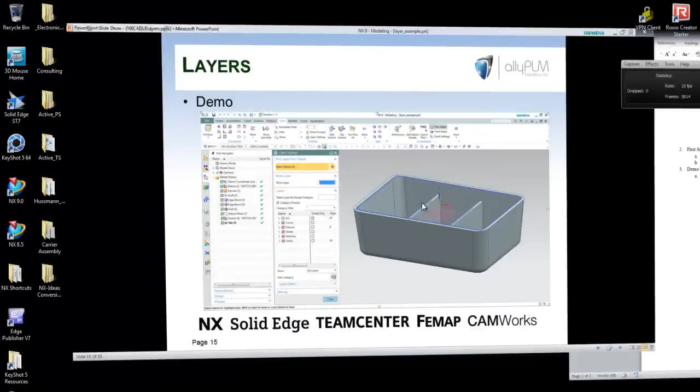Alright, so here I have a model, and in this case this particular model only has one solid body, but as you know, we can have multiple solid bodies. In this particular model we have a couple sketches, a datum plane for construction, and then the solid body. So if I go to the View tab, here are the commands on the ribbon. Here's make work layer, move to layer, layer settings.

If I go to the pull-out menu and I go to Format, Layer Settings, Layer Visible in View, Layer Category, Move to Layer, and Copy to Layer. As I mentioned earlier, I am using NX9. If you are still using 8.5 or older, you'll see that here's the same Format pull-down menu, and then in your utility toolbar you'll have layer settings.

Also, just in case I forget to mention this later, here in NX9 you see that this is Make Work Layer. Make Work Layer is also here in this top border bar. But if you are running 8.5 and older, you can turn on this work layer dialog, so that instead of going into layer settings to make the work layer, you can just type in the value and then that's your work layer moving forward. So like I said, you can add that to a toolbar. Customize your user interface.

Alright, so let's go ahead and click on layer settings to start off. I'm going to hit reset in my dialog just so mine's the default layout, and the first time you go into your layer settings command it would look similar to this. We're just going to work top to bottom through some of the options and how to manipulate this dialog. First of all, you'll see Find Layer from Object.

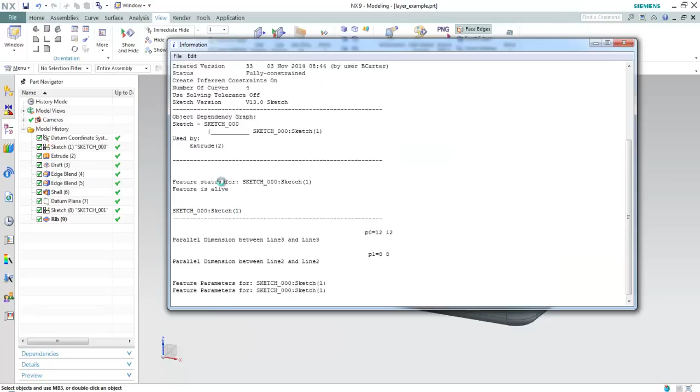So you can pick it graphically and say, hey, what layer is that on? It'll show you. Outside of that dialog, just a little extra bit of information. If you go to the Information pull-down menu and go to Object, and I pick that sketch again for example, in the information window it'll also tell you what the particular layer is for that feature, or in this case the object. So that was Information, Object. Let me go back into layer settings.

Here's another place to create the work layer. I can type it in here, or as I mentioned, I could type it up here in this particular tool. It's the same work layer. You can also double click to change work layers.

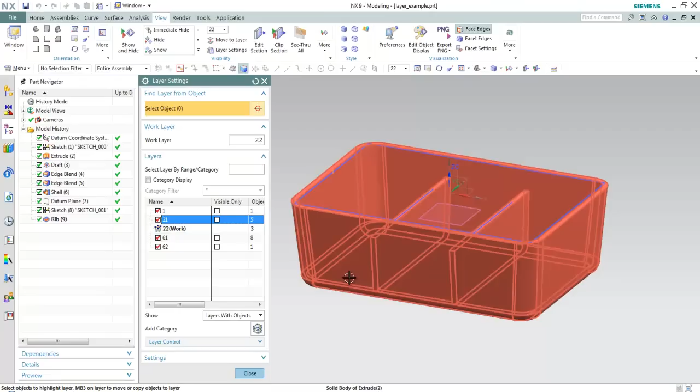We haven't talked about categories yet, but you see that I have one sketch on 21, another sketch on 22. Maybe I want to put another sketch on 23, so I'm going to go ahead and make 23 the work layer, which I could have typed here.

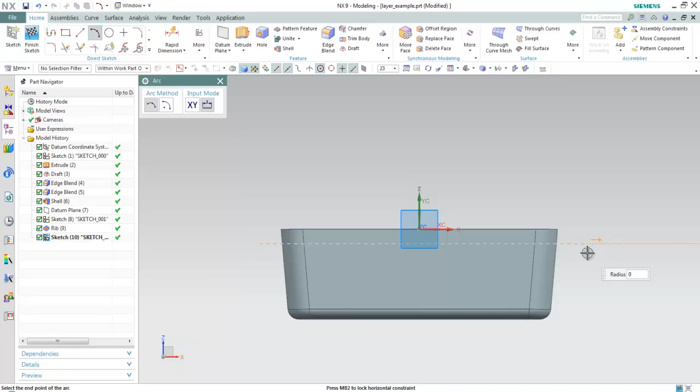If I want to create another sketch, I'll put it on the center plane. Maybe I need to put some kind of cutout shape to this particular part. Let's do it this way. I'm going to do an open profile. Let me get rid of that line, and let me just draw an arc, an open arc. Obviously I'd apply some kind of dimension to that.

So I have my sketch. If I go back to layer settings, I'm going to change my work layer so I can change the visibility of 23. You see as I turn that on and off, that arc sketch is being turned on and off. As I mentioned earlier, I could select it and it would show me that it's on 23. So I made 23 my work layer. Every object I create after that point is going to be on 23.

Later we'll talk about, well, what if I forget to change my work layer? Can I move an object to another layer? And the answer is yes, we have move to layer.

Let me go back to the layer settings. We talked about selecting the object to find what layer it's on, the work layer. Now let's look down here in the guts of the dialog where it says layers. We'll come back to category display here in a minute.

So here I have a list of some particular layers, right? There's one and it jumps to 21. Notice I have this filter down here that says layers with objects. So every layer that has an object, sketch object, datum plane, solid body, etc., is going to show up in this list. If I change this filter to all layers, then all the layers in NX are going to show up. If I scroll down to the bottom, you'll see that there are 256 layers.

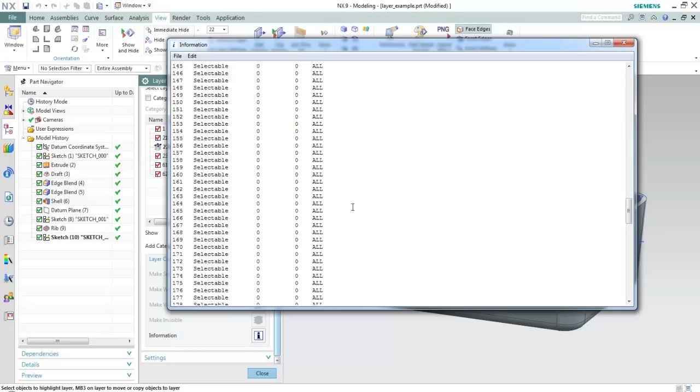I'm going to go ahead and collapse the layer control. Actually, before I do, there's another bit of information here. There's an information command or option you can pull up, and that'll pull all your layer information out into a text file.

So that's what that does. I'm going to go ahead and collapse the layer control. So we've talked about the work layer, visible, invisible, and visible only, which means it's not selectable. If I come over here and look at the columns, we have a name column, which is the layer number, and the visible only status.

We have the object count, so it tells us how many objects are on that particular layer. And notice here is a category column. It says that layer 1 is part of solids, 21, 22, and 23 are part of sketches, that's why I put them in there, and 61 and 62 are part of the datums category.

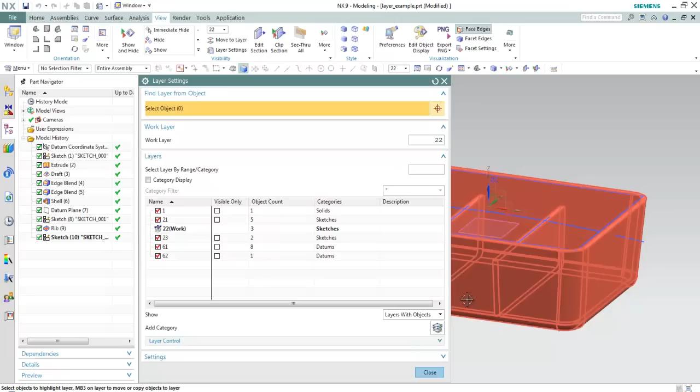If I right click on a column, you can go to columns, and I could also turn on description. We'll look at description here in a minute. Also underneath columns there's configure columns, and you can reorder the order, kind of left to right, of those particular columns.

Now, while we're talking about categories, you see there's a checkbox here for category display. So I turn on category display, and I'll bring this back over here in a minute, and notice how it kind of cleans up the long list.

Now, it wasn't that long because I had layers with objects, but if I change this to all layers, we don't see the 1 through 256 at this level. Now you do see a category called all. If I branch that open, then that is 1 through 256.

But this is where we're really going to start talking about our layer standards at our company. Obviously 1 through 256 can be used a certain way at our company, but having this category display turned on, we can say all our curves, anything that's a curve, is going to be on one of these layers, 41 through 60.

If it's a datum feature, it's going to be on 61 through 80. Or if we're going to add a sheet body or a surface, we're going to put it on 11 through 20. Or the solids are on 1 through 10. In this case, we added a sketch earlier, and the sketches in this particular template were set up to be 21 through 40. So this is giving you an idea of how we can have different categories, saying that this group of layers is going to belong to that category based on this object type.

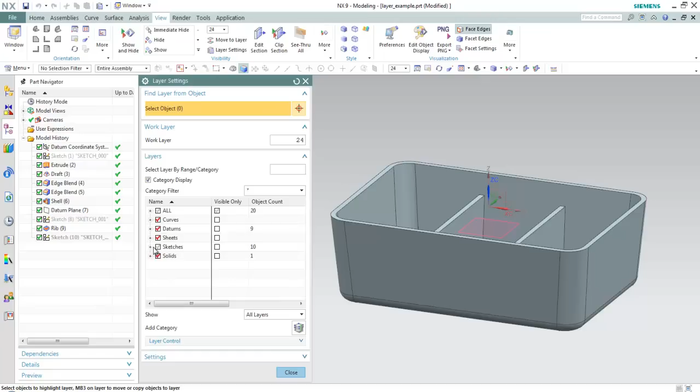So I can turn back on all the sketches with one click. Yes, you do have hide and show, just by coming out here and right clicking hide and show, or if you're used to the old terminology, blank and unblank. But notice here, having it on a layer in a structure, all of us designers or engineers, NX users interacting with the same data, we can have the same layer structure, and if we're all using that, it's going to make it easier for us to interrogate somebody else's model.

Okay, so how do we add our own categories? Well, if I branch open all, this was 1 through 256. So let's come up here and start creating another category. Maybe we'll start at 201.

I can come in here and do my control and shift range. I'm going to hold down shift and select 210 to select a range. If I right click, I can say add to category, either to an existing category or create a new one on the fly. So those were added to a new category, right now called new category 1.

Maybe I have something called construction, since that makes sense for our business needs. Okay, so we've added construction. Underneath construction, I have 201 through 210. I'm going to collapse that back. Okay, that was up to 210.

So maybe I want to do 211 to 220. Here you saw that I did a shift range, but up here I can also do something called select layer by range. So if I want to do 211 to 220, see how it automatically selects those for me. Then I can right click, say add to category. I'm going to say new category again, maybe one called reference.

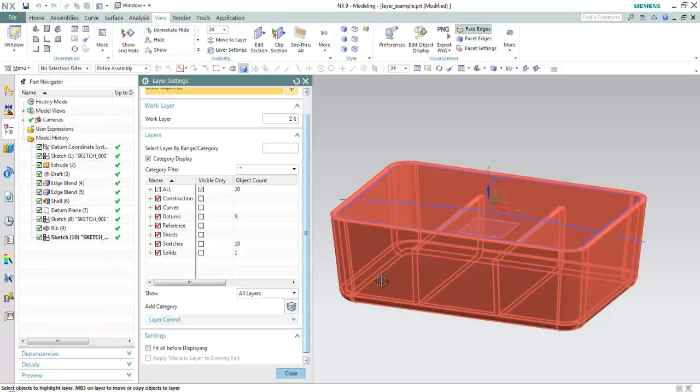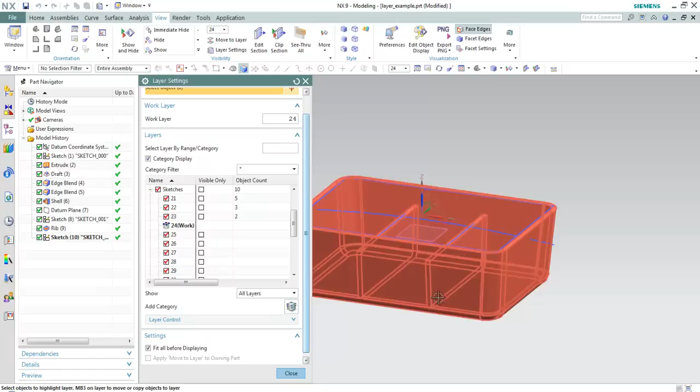So if I zoom out, if I come in here to a specific layer and I turn off that layer, now if I turn on this fit all before displaying, if I say show that layer, it'll automatically fit the screen. So all that's doing, whenever you turn on and off something, it'll automatically fit your screen. That's what that option does. Okay, we'll talk about the move to layer stuff here in a minute.

So to show the move to layer, I'm going to go ahead and open up the same model, but with a little different formatting. If I look at the layer settings here, I'm going to turn off category display for a minute. So here I have the work layer, and 61 is the only thing with objects. If you do a new out of the box Siemens template, I'm going to go ahead and turn off the work coordinate system to WCS for a minute for clarity.

If I come in here, you see layer 61 has that base coordinate system, that datum coordinate system that starts the template off. So basically everything after that, my work layer was 1. Everything I've done in here, I put it on one particular layer, in this case layer 1. So I want to be able to move these objects after the fact to their proper layers to maintain my standards. I didn't do a good job of changing the work layer before I created geometry.

So if I go move to layer, which as we said is also underneath the format pull down menu, I can come up here and say, okay, I want to move this sketch to a layer in the sketches group. I can't remember that it's 21. So if I click sketches, see how it's going to put 21, which is the beginning of that range. Maybe I want to put that sketch on layer 21. I'm going to hit apply.

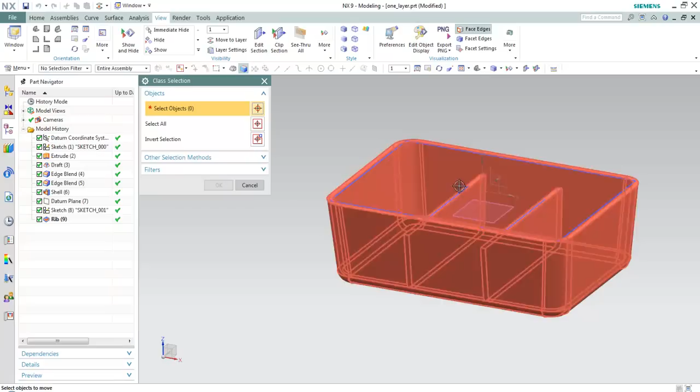So then I can come over here and grab this sketch and say, okay, well, let's put it on sketches. Well, maybe I also want that sketch on layer 21 so they're grouped together, but maybe I want it on its own layer, so I can change that to 22. I'm going to click select new objects. I'm going to grab the datum plane and say, okay, well, that needs to go into datums group. Well, that coordinate system was already on 61. Maybe I want this to be on 62.

Okay, so we've gone ahead and we've put the sketches on different layers. We put the datum on different layers. The solid body is on layer 1, which is okay. So if I go back to layer settings, right, solids, that was my work layer, which is the solid body.

So if I make layer 2 the work layer just for a minute, so if I turn off layer 1, that's the solid body. If I branch open sketches, there's 21, which is the rectangular sketch. There's 22, which is the rib sketch. And then underneath datums, we had 61, which was the base coordinate system, and 62, which is the datum plane there. Okay, so you'll see inside of layer settings, I can build my categories, and then after the fact, as I showed you, we can do a move to layer.

Okay, if I come back up here to the format menu, there's also a layer category here. Now layer category, you'll see that here's my existing categories. I can create a new category. So earlier I did the example of construction. I can say create/edit. Okay, so that's going to create the construction category, and I can say what layers I want to be in here. So I think we had said 201 to 210.

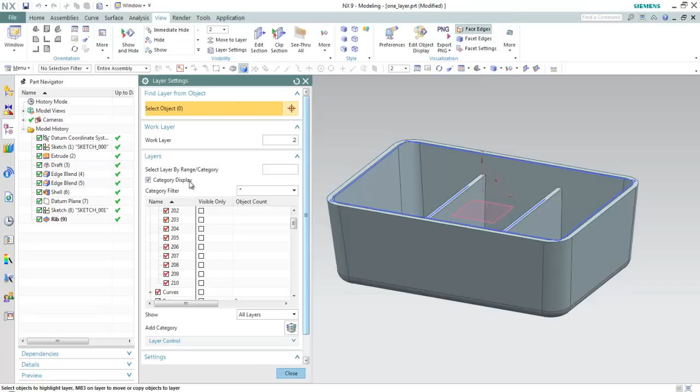I personally prefer doing the categories here in the layer settings, kind of all one-stop shop, but there's nothing wrong with going to format and setting up your categories here. I'm going to go ahead and talk about it now. I mentioned I would talk about it later, but setting up a template, right? Here I had two separate part files, so I had to redo the work to set up that extra category in this new file.

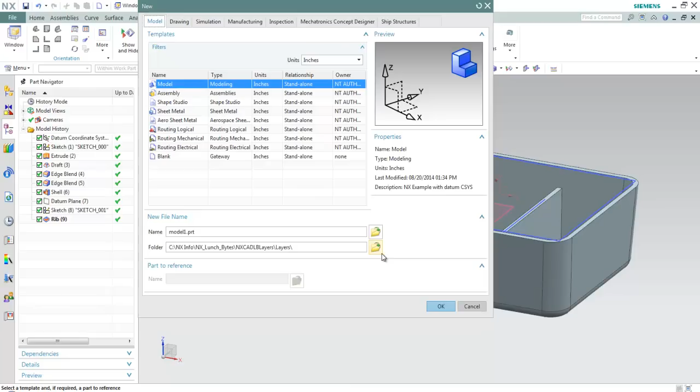So myself as maybe a CAD administrator or a person in charge of my NX install, maybe I want to set up a template. So whenever I do a file new and I go grab a model template or my company standard template, I already have the layer categories set up, right? So when I go into model and I go into my layer settings, I have the categories and the range of layers set up, so I don't have to create those each time, right? It's starting new. Now I just use the category and use the layers. All right.

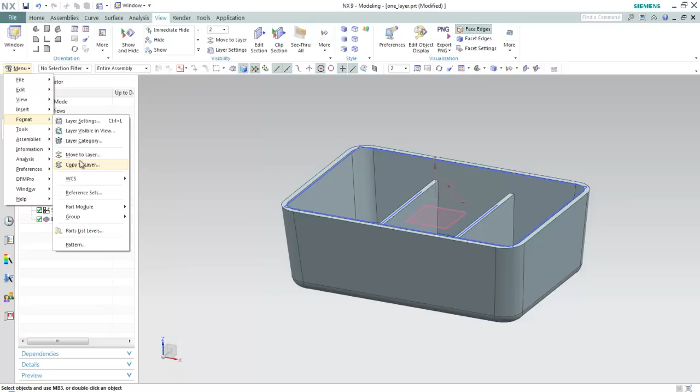The last thing we want to talk about is the layer visible in view. I guess I could mention, I'm not going to take the time to show you, we did move to layer, but you could also copy to layer. So an object can exist on more than one layer. Okay, layer visible in view.

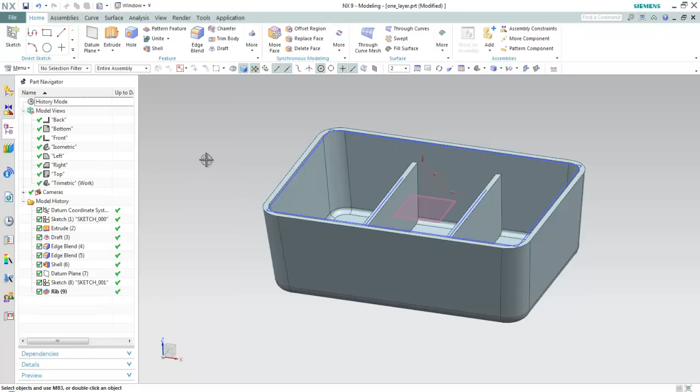So right now I'm in model space, right? I'm in modeling. So if I come over here and look at my model views, these model views are kind of your default out of the box, your top, front, right, ISO, and so forth. If I come up here and I go to view, operation, and save as, I'm going to do a little obscure view. Yes, we could set this up to be a certain orientation, but here I have this certain orientation I want to save, and I can do save as, and I'm just going to call this my custom view.

Okay, so I have a custom view, which is my work view. Alright, so if I come up here, I can say in this particular custom view, I don't want the sketches to be shown. So I can say Layer Visible in View for my custom view, and I do not want 21, 22, and 23 to be visible. So I can make those invisible, and notice how they turn off for this view.

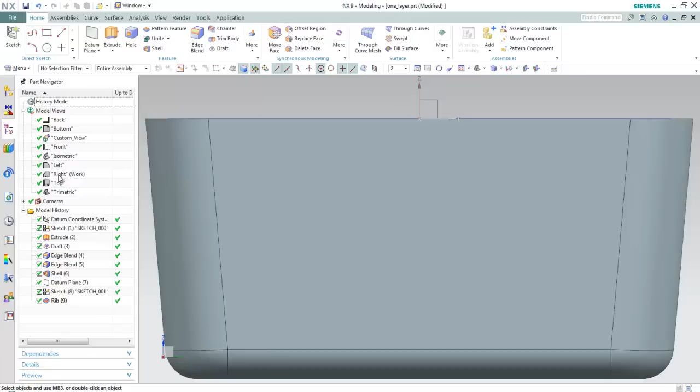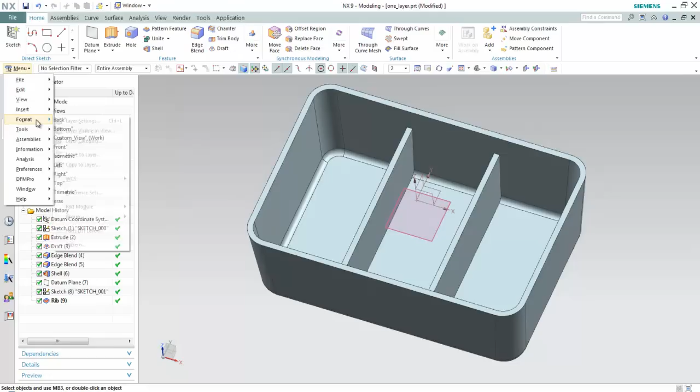Now one thing that sometimes stumps users is once you've done the Layers Visible in View, you want to come back and save this view. So I'm going to go to View, Operation, and just say Save. So now if I switch to the right, or one of the other views, the sketches are back on. But if I double click and go back to my custom view, it'll set that orientation because that's what the model view does. But notice that layer behavior for that particular view is also saved. So in this case, the sketches are not shown. They're invisible. So Layers Visible in View works for model views.

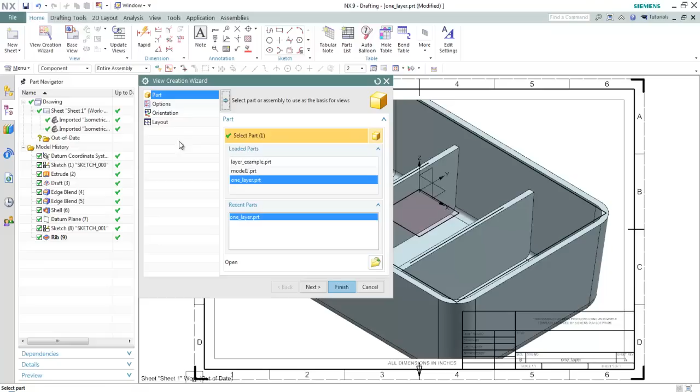Also, just to give you a taste here, if I do a drawing, I'm doing a drawing in the same file. I'm basically creating a sheet in here. So if I grab a particular size sheet, let me just do a base view, and let's just do a top. Make this a little smaller too. Right now, see how it's previewing the coordinate system, the datum plane, basically everything that's displayed in the model.

So if I hit close, now remember this is not a master model example. This example is where I did Start Drafting. The drafting sheet is in the same file as the model, so it's using the same layer structure. So if I come back over to the model, and I'm not going to use the layers, but if I do a hide, I just did a Control W, which is Show and Hide. I can come up here and say I want to hide all sketches and all datums. So they're turned off the display here. If I go back to the drawing, they're turned off here.

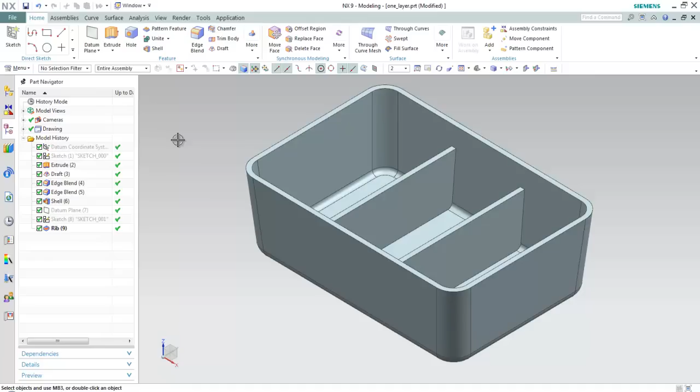But then if I come back down the road and I say, well, go ahead and show all that stuff, show the datums with the plus sign, and show the sketches. So basically I've turned everything back on. But when I go back over to the drawing, all that stuff's back on.

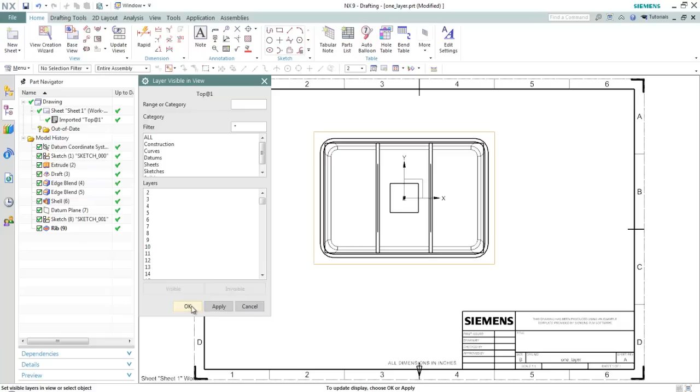So here in the drawing, I can use Layers Visible in View. You can do it for a sheet or the view. I'm just going to pick the view in this case, which is selected, and say I do not want anything but the solid body. So I can grab everything but the layer the solid body is on and make it invisible. And notice that it turns off all that. So now the only layer that's visible for this view is layer 1, so I don't show the construction geometry. So just a couple of quick examples of Layers Visible in View for model views and modeling, and then Layers Visible in View for drawing views for drafting.

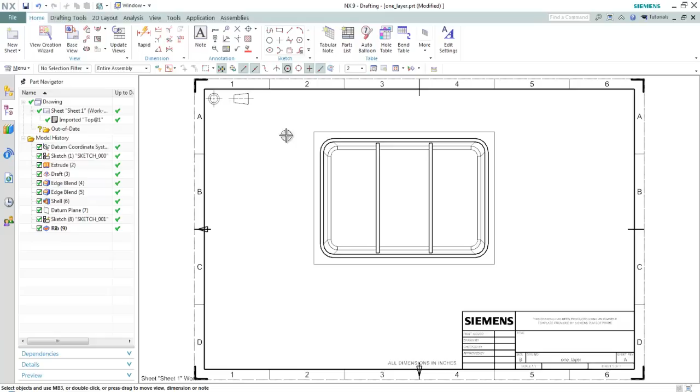Alright. Alright, so that wraps up our 30 minutes.